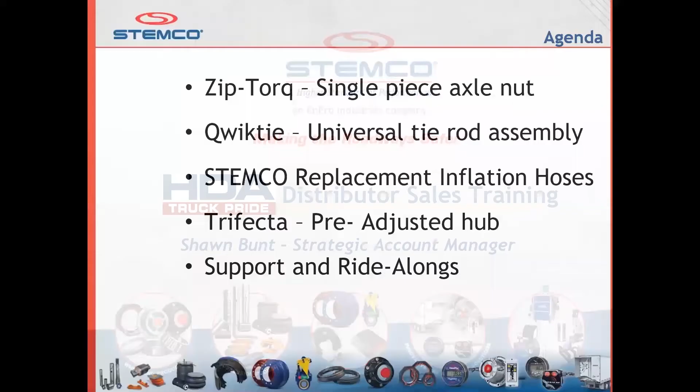So we'll go ahead and get right into it. Today's agenda, we're going to talk about 5 main things. First will be our new Zip-Torq axle fastener. It's a single piece axle nut. It will not be replacing the Stemco Pro-Torq nut. It's just in complement to. It installs the same exact way you would with the Pro-Torq. It just installs a little faster, a little bit safer to use.

We will also talk about our Qwiktie, which is our new universal tie rod assembly. Not only is it easy to sell, it's easy to stock with just 2 part numbers. Next, we'll talk about our Stemco replacement inflation hoses. Then we'll move into our new trifecta, which is a pre-adjusted hub assembly. And lastly, we'll talk about some of the things we can do to support your distribution efforts, along with field work and any training opportunities there might be.

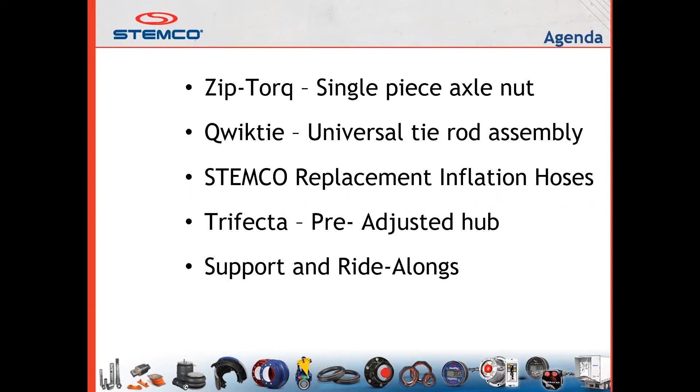All right, so first off is our Zip-Torq axle fastener. So this Zip-Torq works very similar to our Pro-Torq that we've had out for years and years. What this does is it eliminates multiple pieces. This is truly a one-piece axle nut. You torque it down the same exact way you would with our Pro-Torq nut.

So any of your customers who are already familiar with the Pro-Torq, they don't have to learn any sort of new procedures or anything like that. They can just simply upgrade to this, and it gives them peace of mind. They don't have a keeper that was installed improperly, or worse yet, not installed at all. So I'm going to show you a quick video on this, and we'll come back and talk about it here.

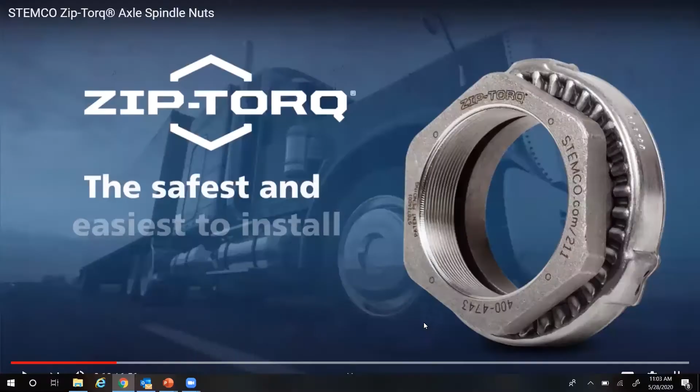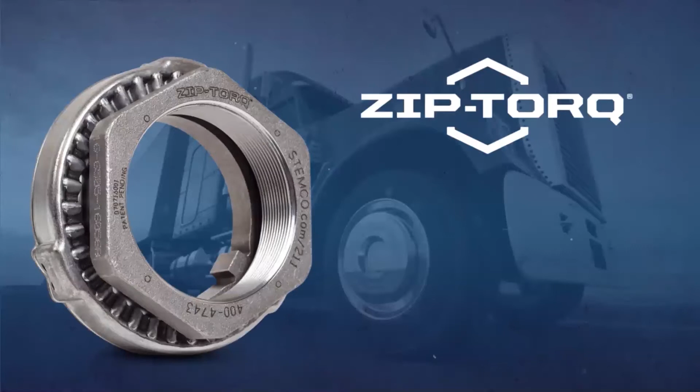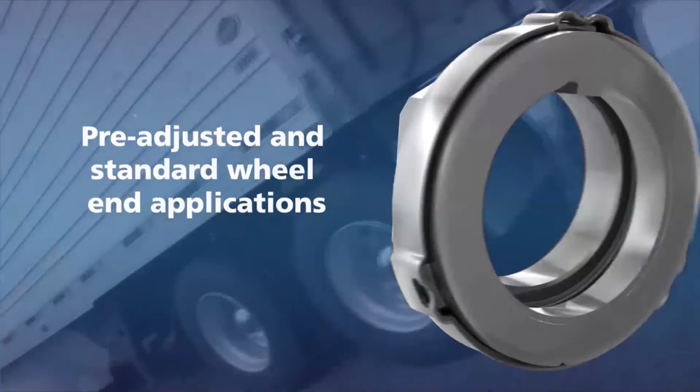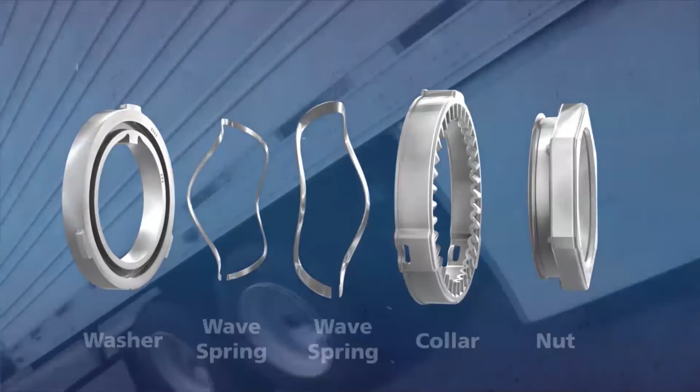Zip-Torq is the latest innovation from Stemco. A fully unitized, single-piece axle fastener designed to be the safest and easiest to install spindle nut in the industry. That means reduced installation time, as well as peace of mind, knowing that the patented self-locking system is locked in place. Zip-Torq works with pre-adjusted and standard wheel end applications and is compatible with a long-life Stemco Platinum Performance system. The secret is in its unitized design, specially engineered to prevent inadvertent back-offs.

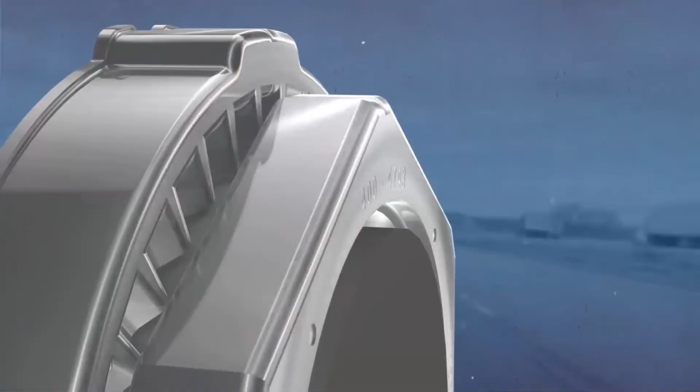When threaded onto the axle, Zip-Torq is secured by its heavy-duty self-locking mechanism. Zip-Torq free spins onto the axle, engaging the extra-wide tang with the axle keyway. As the nut is spun onto the spindle threads, it contacts the bearing surface, compressing the assembly and engaging the teeth with the collar.

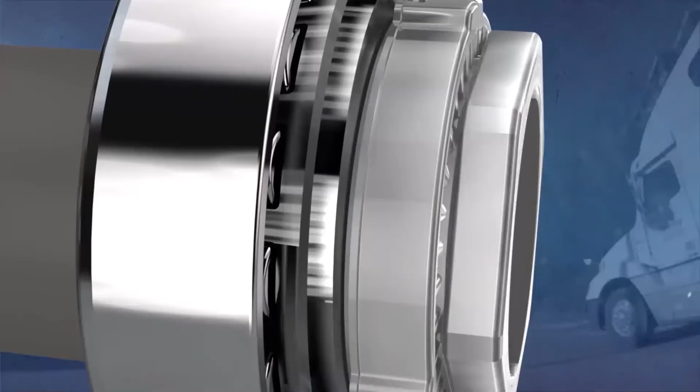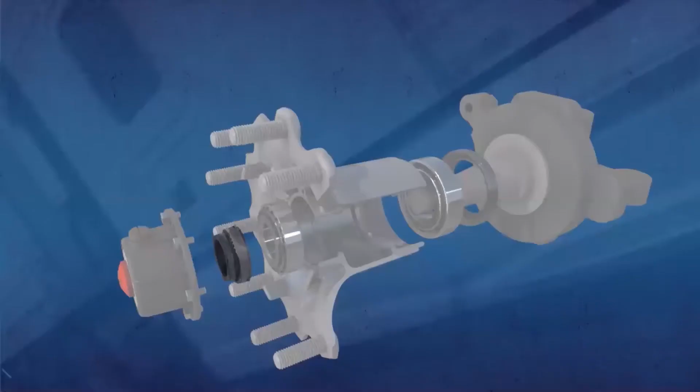Consistent locking force is then maintained by the high-strength wave spring, eliminating unwanted back-off. So when the nut has been torqued down to the proper end play adjustment, you can be certain that it is completely locked in place. But when the locking feature is disengaged by a breaker bar, Zip-Torq can be easily removed.

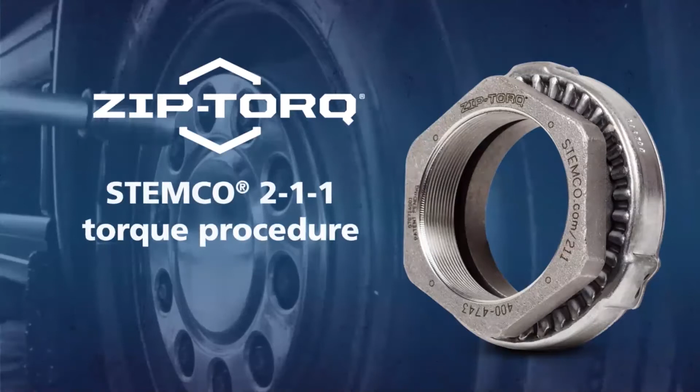To install, hand tighten the nut onto the spindle threads and then follow the Stemco 2-1-1 torque procedure. For more specific installation instructions, see our Zip-Torq installation video at stemco.com/211. Stemco, leading the industry in wheel end innovation and high performance systems since 1951.

All right, so that video does a good job explaining how the nut actually works with the two opposing wave springs or wave washers in there. It does self-lock itself down. The part numbers you see on the screen there are the most popular part numbers on the market. That covers the majority of everything. Since the slide was originated, we've added some MAC part numbers, so we do have a full line of coverage now, which is nice.

One of the things Stemco does is we offer field training. So we'll go out to a shop or a fleet or whoever it is, and we'll actually demonstrate our products and the benefits of using this. So this is one of the products we show regularly. And after I demonstrate the product, I usually get two very common questions. One is, is this nut reusable? And the answer is yes, it's definitely reusable.

I always tell the little story that this Zip-Torq actually has more miles of testing than any product Stemco's ever sold before. Part of the reason for that is we had a very large OEM that asked us to manufacture this product, and we showed it to them, we demonstrated it to them, and after that they said, that looks great, that sounds great, we need 5 million miles of testing. So we said, we can do that. We've exceeded the 5 million miles of testing, and those nuts were taken on and off over 60 times in the process of that testing.

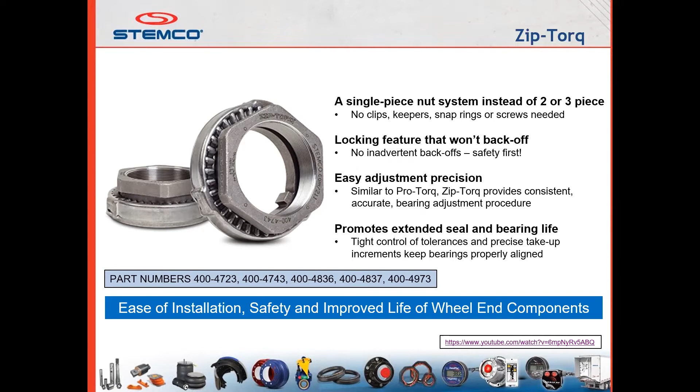So the reason I bring that up is if you replace that orange keeper one time, you've actually paid more for a Pro-Torq than what you have with a Zip-Torq. So same technology, just eliminates one element to it, just a little bit better mousetrap. So we've been having really good luck with that. We have a few major fleets that have switched their entire fleet over to the Zip-Torq, one of those being Walmart, and another one being Waste Management. So it's tried and true, and we've had great luck with it.

Next thing we'll talk about is our new Qwiktie. This Qwiktie has two part numbers that cover about 80% of everything on the market. Anything with a straight tie rod assembly, this will work. So from a distributor standpoint for you folks on the call, those two part numbers will really cut down the amount of inventory you have to keep on hand. The cool part about this is each one of these, whether it's the standard 12 to 13,000 pound front axle or the heavy haul up to 20,000 pound front axle, both tie rod assemblies will adjust from 57 out to 73 inches.

So this was designed and engineered by the same people that design and engineer our Kaiser Kingpins, if you're familiar with them. They come out of the same factory. You'll notice the diagram at the top of the screen there. One of the clamps is painted blue. The reason for that is just to indicate that that's the passenger side, the curb side of the vehicle. That's simply because both sides thread in opposite directions, so it just helps with the ease of installation. This unit will come pre-lubed. It also has the Zerks built into it for easy maintenance practices. So I'll show you a quick video on this as well.

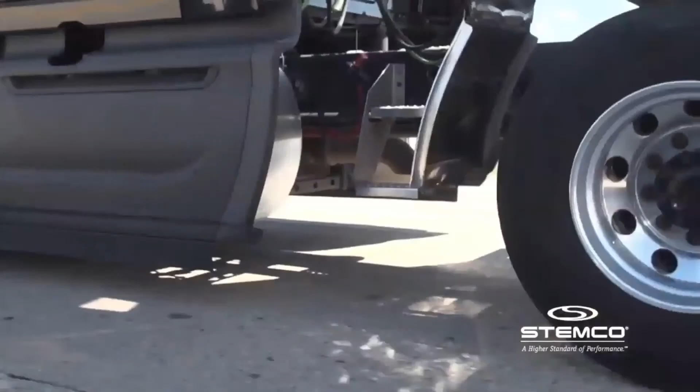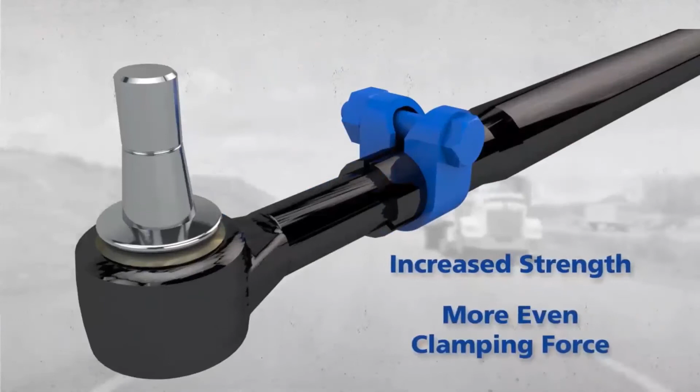Introducing the world's first tie rod assembly that fits over 80% of commercial vehicle tie rod lengths and assemblies, the Stemco Qwiktie. Just 2 SKU numbers adjust to fit the vast majority of straight tie rod lengths, allowing Qwiktie to reduce inventory and overhead while delivering unmatched performance and versatility. Plus, its increased strength and a more even clamping force hold the alignment longer and reduce stress on other components. Visit Stemco.com to learn more about the Qwiktie tie rod assembly.

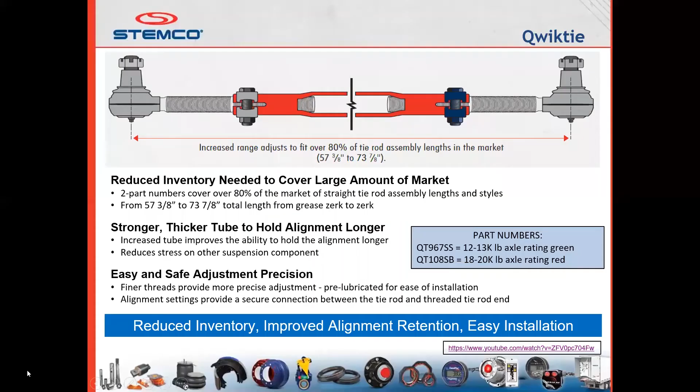All right, with the Qwiktie, we do have some nice sales material as far as a quick reference little card for your sales guys out in the field. If you need some of those, let myself know or let your local Stemco rep know, and they can get those for you. Again, it's 2 part numbers, very easy to sell. From a cost perspective, you can go out and sell these all day long. I like to joke that it's the easiest thing to sell that Stemco manufactures.

The nice thing about this is it's actually a 3-layer hose. So the inner layer is a nylon hose. On the outside of that, you have a steel mesh hose. And then on the outside of that, you do have a fabric braided hose. So there's 3 different layers of protection. Again, that adds for the higher temperature rating.

Also, it has the Schrader valve, so you don't have to disconnect that from the tire valve each time you want to check your PSI, and that's going to save the O-ring on there. So people really like the ease of access of that Schrader valve, and then the durability of the product. One of the nice things is that temperature rating. With the chrome and aluminum wheels you see out there, the heat gets quite intense coming off the road. So the added protection of the steel and the cloth braid really helps.

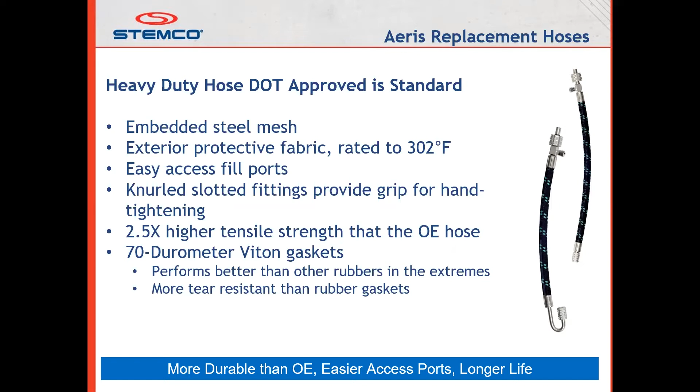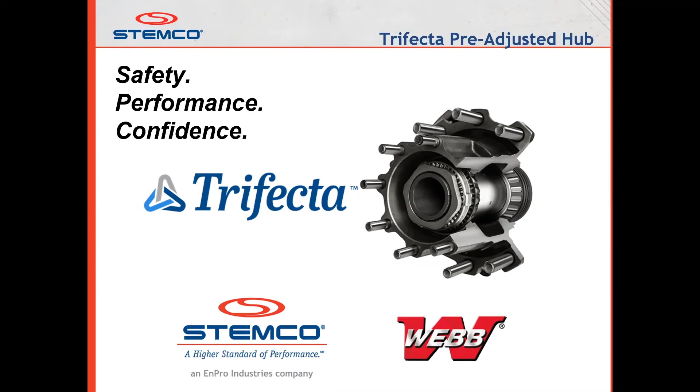We're going to move on now and talk about our Trifecta pre-adjusted hub. So right now, as the industry stands, ConMet absolutely dominates the pre-adjusted hub market. We got feedback from some customers on some things they think would be better, and we took all that into effect, and we came out with our own pre-adjusted hub, and we'll go through some of the benefits for you. So this is a complete wheel end package. Everything you see here, minus obviously the spindle, will be included with the Stemco pre-adjusted hub, the Trifecta.

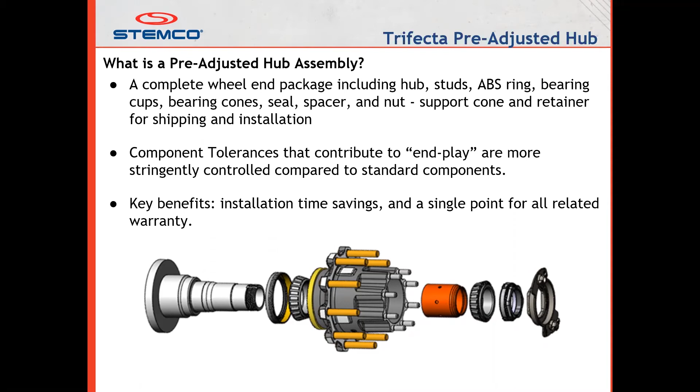So not only is it going to save you time, it's also going to give you a very precise end play adjustment, which is going to help increase your tire life, increase your fuel mileage, and give all sorts of added benefits. But the savings of time is probably the number one.

So with this, you get a Webb hub. The Webb hub is the only component in this that we don't manufacture. So we don't make hubs, but everything else is a Stemco product. And the reason that's important, the feedback we got from our customers with the competitive product, if they had a seal issue or a bearing issue or an axle fastener issue, they had to get multiple different manufacturers involved because it wasn't the same manufacturer making all those products.

So with our offering, we include our Discover XR seal, which is a new seal for Stemco. We currently have in the aftermarket world just the Discover seal. The Discover XR works very similar. It just has an added extra lip. And what that is for is because of the added weight when you're installing, it doesn't nick or ding up that seal.

So some of the feedback we got on the competitive product, that spacer gets torqued down so tight and crushes that it's not allowing the lubricant to move around. The lubricant's what ultimately makes that wheel end function the way it's supposed to. So you can see right in the center there, we have holes actually drilled throughout the spacer, and we patented that. And the idea is it moves the lubricant around and extends the life of those wheel ends.

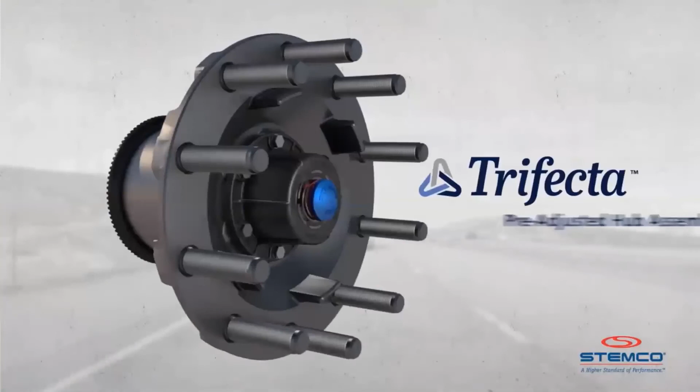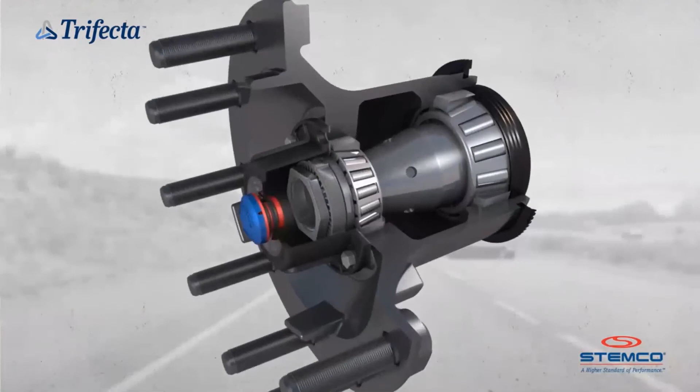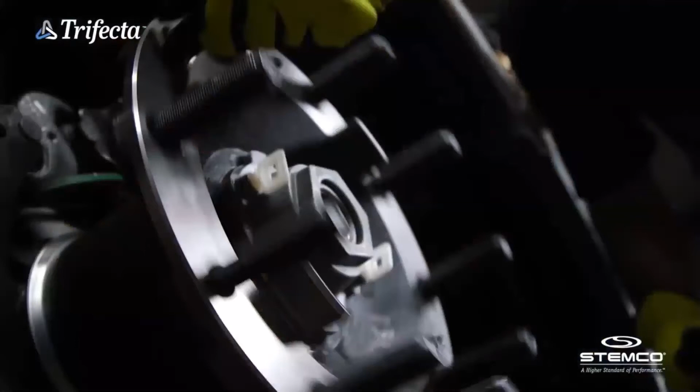Safety, performance, confidence. Why settle for just one or two of those when you could have the trifecta? Introducing the Trifecta Pre-Adjusted Hub Assembly by Stemco. Combining premier Stemco wheel end technologies with a trusted Webb wheel hub, the Trifecta Pre-Adjusted Hub Assembly represents the pinnacle of efficiency and roadway safety. Quick and easy installation with no bearing adjustment required. Unmatched protection against corrosion and contamination. And backed by a 5-year parts and labor warranty for total peace of mind.

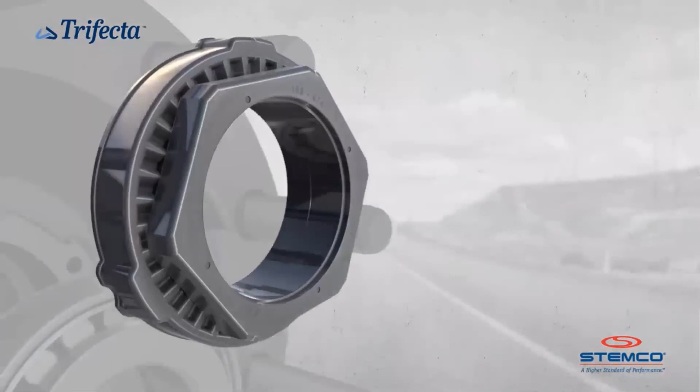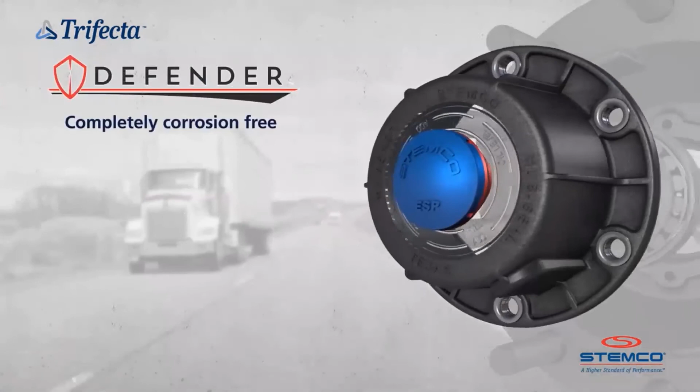The Trifecta includes the Discover XR Wheel Seal, a high-performance seal that provides quick and easy installation, exceptional contamination protection, and long life. The Seal ID includes Stemco's patented Glide Lock technology, significantly reducing installation force by 50% with no pre-lube required, a first of its kind for the industry. Also included is the Zip-Torq axle fastener, featuring a unitized design for faster, safer installation. The Defender hubcap, made from 100% composite materials, eliminates corrosion for long life and reliable performance. The ESP extended service plug protects lubricant integrity.

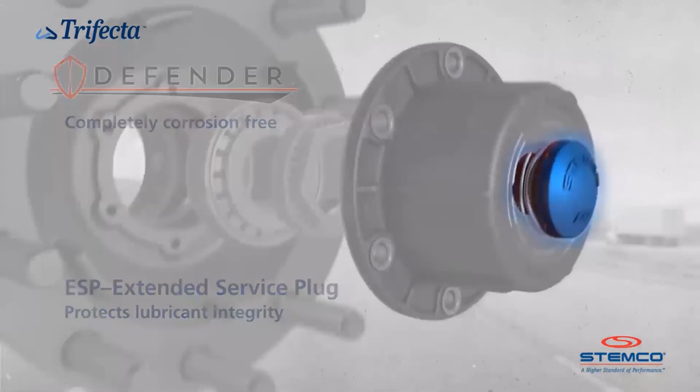And the proven Webb wheel hub provides uncompromising performance and durability. Installed as a single assembly, these industry-standard components eliminate the need to purchase, install, and adjust separate wheel end components. Safety, performance, and confidence. Stemco Trifecta, our latest innovation in making the roadways safer.

All right, so that video does a really good job of explaining all the different components, but like I said, the ease of installation is super simple. We've had guys out in the field that are doing training and showing this product off, and our customers can't believe how easy it installs and how well it performs.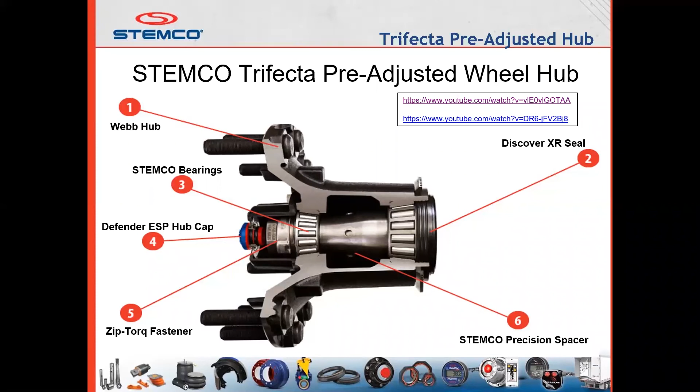So lastly, I will talk about some of the things Stemco can do in the field to help you out and help your outside salespeople out. Most people know us for our focus on the hands-on Stemco training off the back of our TCV trucks. These TCV trucks, we do have currently 12 of them out in the field right now. Well, I shouldn't say right now because we're on a travel restriction because of COVID. But once travel restrictions are lifted, these are daily drivers for our district sales managers. They're out every day doing wheel end training, doing Kaiser training, doing brake training.

They'll be more than happy to come to your location, come to your customers' locations, whatever we can do to give your customers that hands-on experience. This is how our products work. This is why our products work. Let's answer any questions you have.

And the wheel end training probably gets requested the most when you're talking to guys about doing a proper bearing adjustment and you show them a dial indicator and show them the proper way to do things. It really goes a long way, and it really helps solidify that business. So certainly utilize your local Stemco reps. Anything they can do to help you out, they would certainly be happy to do that.

I do want to let you know right now during travel restrictions, we have all of our training available on our website. So you can go to stemco.com. Up in the top right of the screen, you can click on the training menu that'll drop down and go to Stemco University. Your counterman can do that. Your outside salesman can do that. Your customers can do that. They'll just register their account. It takes about 1 minute.